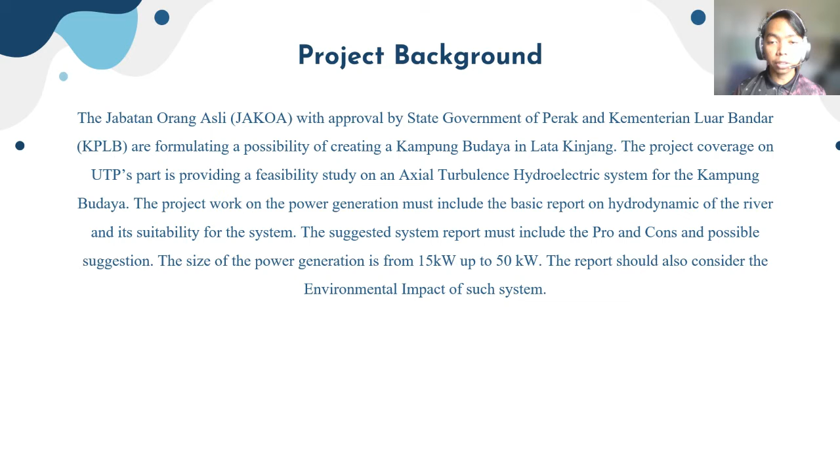Let's start with the project background. The Jabatan Orang Asli, with approval by the state government of Perak and Kementerian Luar Bandar, are formulating a possibility of creating a kampung budaya in Lata Kinjang. The project coverage on UTP's part is providing a feasibility study on an axial turbulence hydroelectric system for the kampung budaya. The project includes a basic report on the hydrodynamics of the river and its suitability for the system, pros and cons,

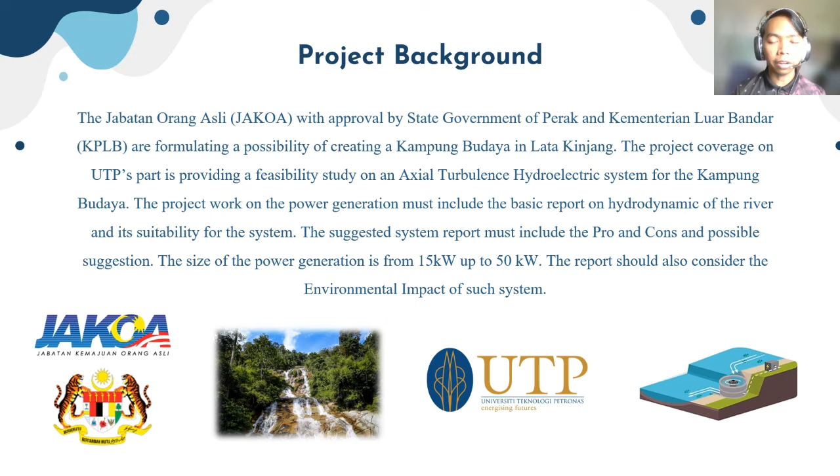and possible suggestions. The size of the power generation is from 15 kilowatt up to 50 kilowatt. The report should also consider the environmental impact of such a system.

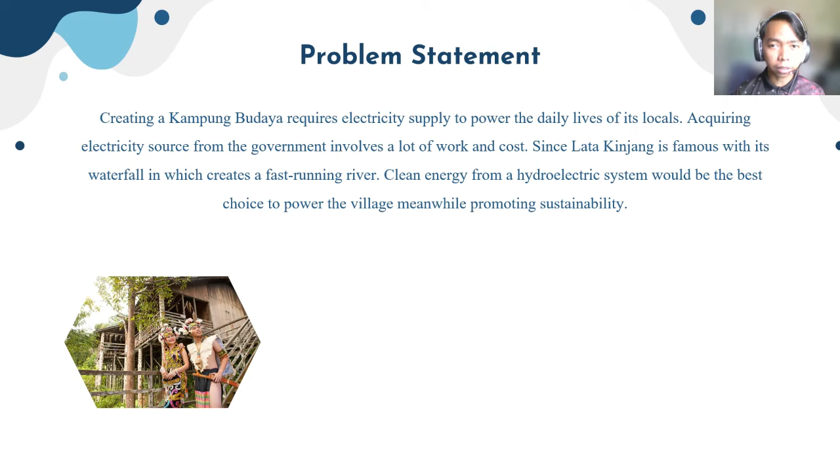Moving to the problem statement. Creating a kampung budaya requires electricity supply to power the daily lives of its locals. Acquiring an electricity source from the government involves a lot of work and cost. Since Lata Kinjang is famous for its waterfall, which creates a fast-running river, clean energy from a hydroelectric system would be the best choice to power the village, meanwhile promoting sustainability.

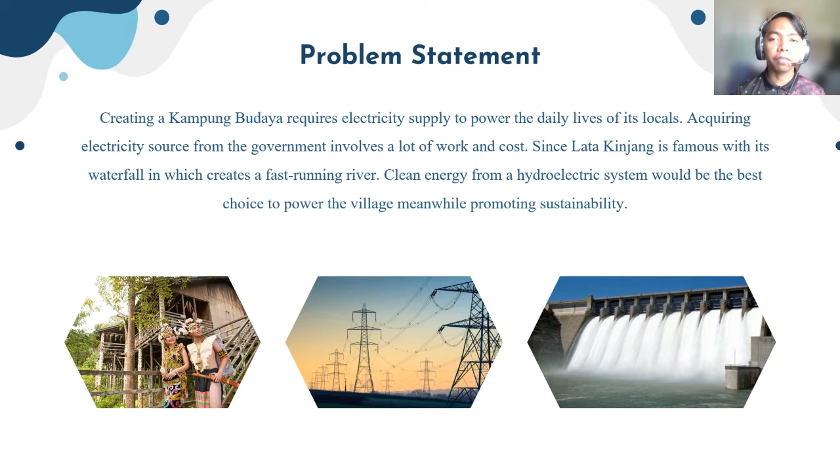The objective of this project is to provide clean and sustainable energy for the communities that reside at Kampung Budaya in Lata Kinjang. To achieve this, an axial turbulence hydroelectric system is to be designed, which provides cost-effective energy and requires less maintenance. For the scope, feasibility study and system design for axial turbulence hydroelectric for Lata Kinjang New Perkampungan Budaya, involving concept generation, evaluation, and selection.

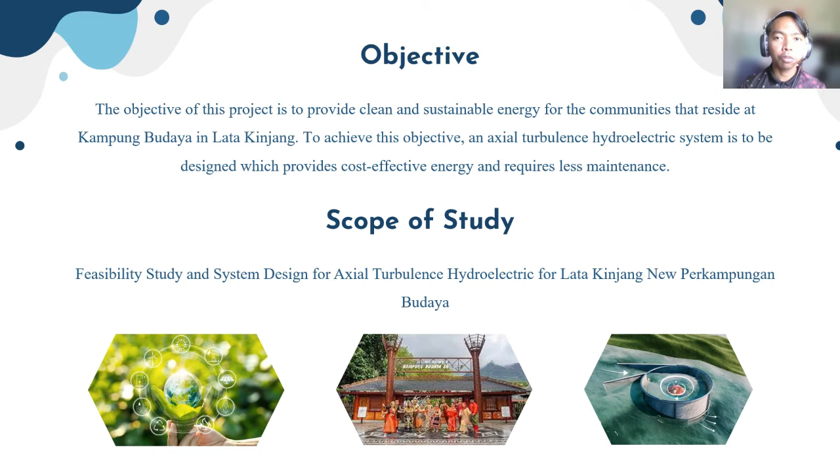Hello, my name is Mr. Oleron. In this slide, I'm going to talk about the datum. There are two datums in these slides, the PicoPica 500 and the Turbulent Hydro. The PicoPica generator is a generator capable of generating electricity up to 500 watts by harvesting the kinetic energy from the stream with a minimum flow rate of 0.1 cubic meters per second.

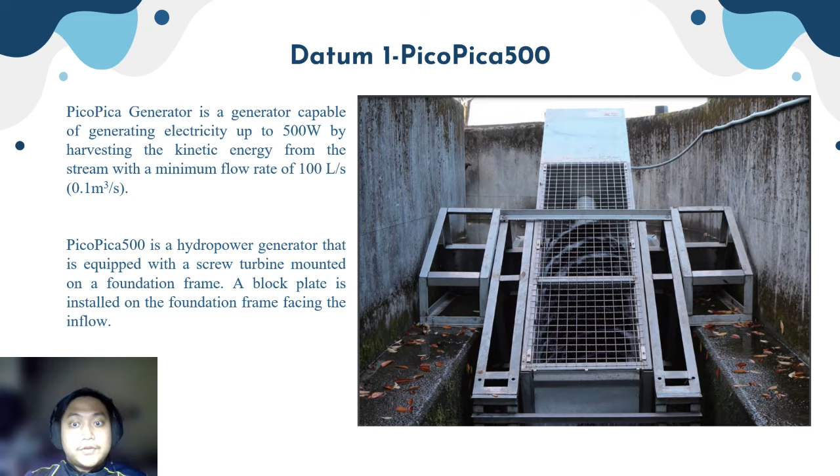PicoPica 500 is a hydropower generator equipped with a screw turbine mounted on a foundation frame. A block plate is installed on the foundation frame facing the inflow. Datum number 2 was the Turbulent Hydro. Turbulent Hydro is a company that designed the vortex hydropower generation system, which can generate about 15 kilowatt to 70 kilowatt of electricity when the site requirements are met.

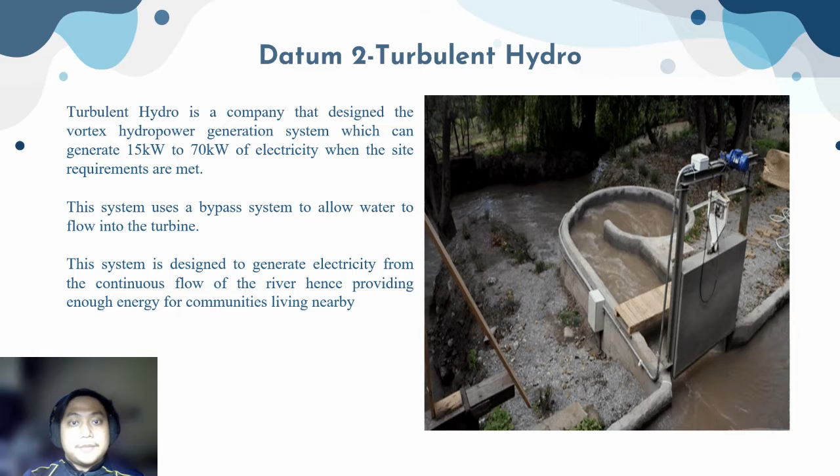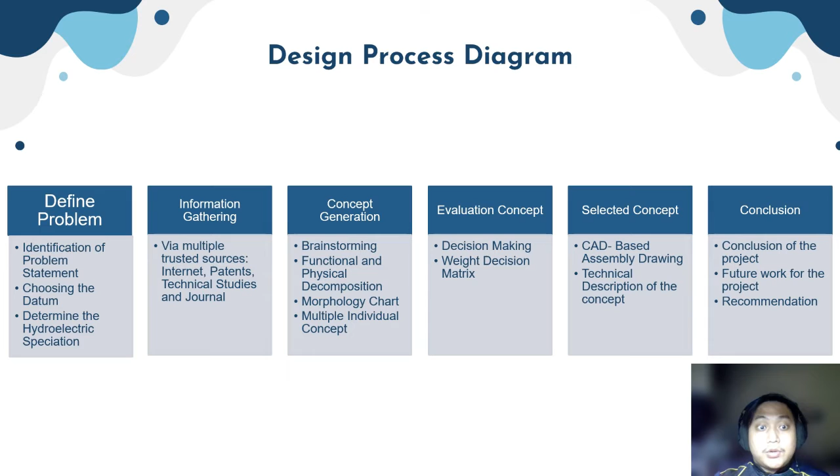To create that, we created a morphology chart, and then each member needed to come out with one individual concept for the hydroelectrics. Once it's done, the concept evaluation takes place, whereby we need to rate every concept using a weighted decision matrix as our guideline. After that, we create a CAD-based assembly drawing for the winner concept with the description of the concept. Lastly, we conclude our project with any recommendation for future work.

As we can see here is the Gantt chart of this project. As shown in the figure, the specific activities are done for this project, with start dates and end dates as our milestones, and we must follow the dates to ensure that our objectives are achieved.

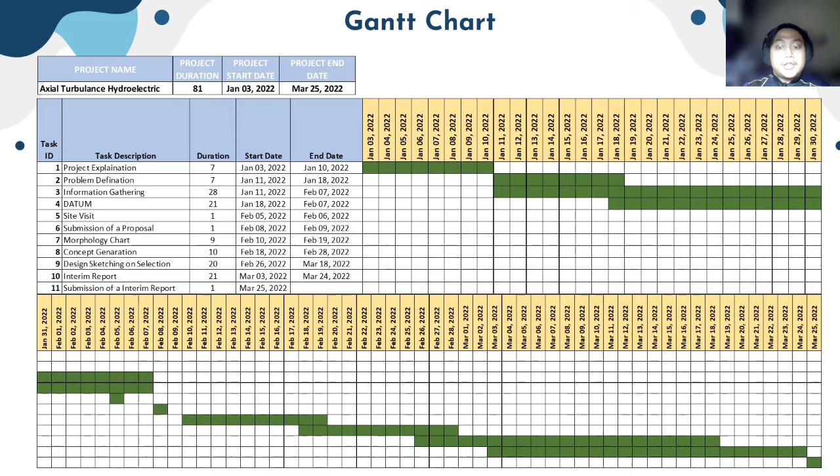Concept generation. So from the information gathering, we have obtained a datum concept to our problem, which are the subsystems that are contained in the hydropower plant. Firstly, there is the filtration system in the top left. It is to prevent debris from the river from passing through the hydropower plant and disintegrating other components.

There is also the flow rate control system, which is important to control the inlet water flow rate to match with the desired output of energy generation and prevent the turbine from overloading. It is also used to avoid flooding or overflowing at the upper reservoir. The plant is also equipped with a water tank system that is responsible for generating flow motion that would initiate and turn the turbine.

The energy translation system, or basically the turbine system, is what translates the potential and kinetic energy of the water flow into rotational energy for the energy generation system to generate electrical power. The power distribution to the area and storage is then managed by the power management system equipped.

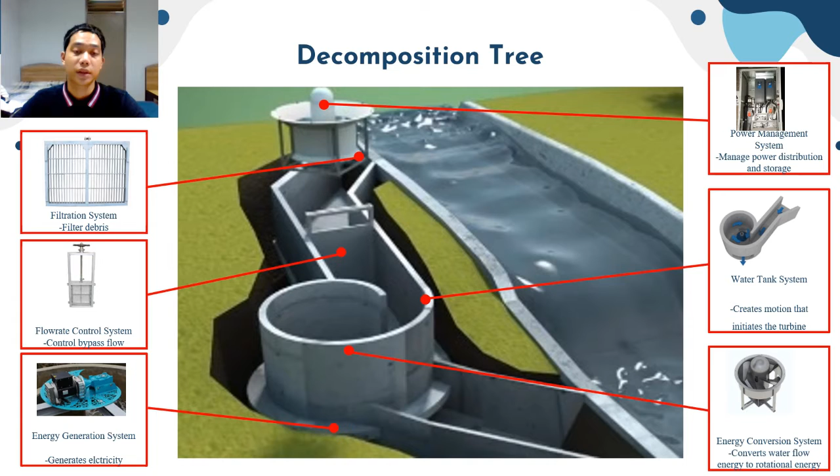After that, we move on to the morphological chart for idea generation. A morphological chart is a visualization tool for generating ideas in an analytical and systematic manner by capturing all the necessary product functionality and exploring alternative solutions and combinations to achieve that functionality. And our morphology chart consists of the subsystems that will complete the hydropower plant, and each option has its own benefits and downsides. Therefore, there are multiple options brought up to create the best possible design ideas.

Options for our filtration system are just a physical barrier for the debris, which come as nets or just metal grills with an automated removal subsystem. Available options for our flow rate control system are just a simple physical gate barrier that will control the amount of flow that goes through the system, or the amount of flow that will bypass the system into the lower reservoir, as you will see in the generated concepts later.

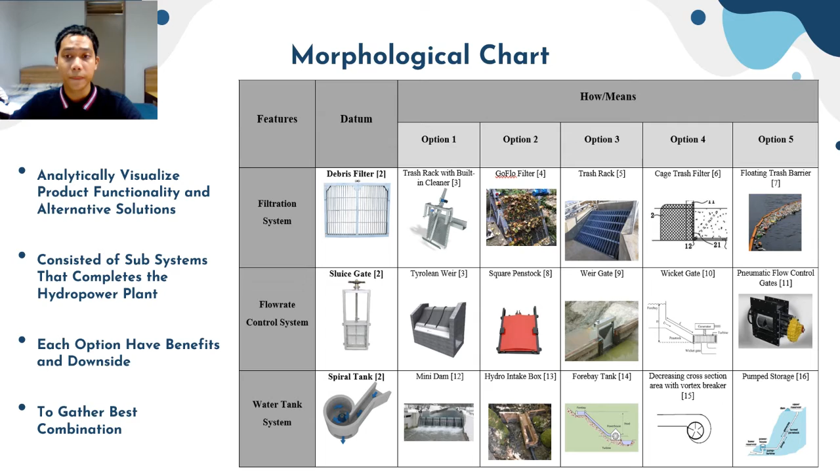Next, we have the water tank system. So the datum water tank system is a spiral tank where the vortex and pressure created will initiate the turbine. Next is the mini dam, which slightly improves the head while maintaining a good flow rate of the system. Next is the water in hydro intake box, which works by directing the flow to the turbine. Next, we have the forebay tank, which increases the efficiency and optimizes the head as the flow is directed straight to the generator rather than having drag slowing down the flow rate or any flow wastage that escapes the generator.

About the selection of turbine system, optimal efficiency conditions between the options are different, such as some require high flow rate, whereas the others require high head. And the produced forces are also different. Some would have higher torque, whereas some would have higher speed. And depending on this, a suitable generator can be selected. Another factor in choosing the generator is the amount and kind of electrical power to be used by the locals there. And the same factor applies when choosing our power management system.

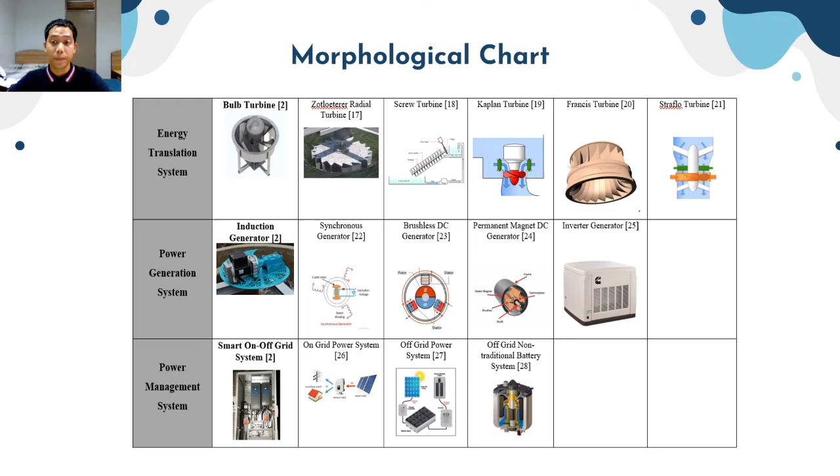After completing our morphological chart with potential solutions to the hydropower plant, each team member has generated concepts based on the subsystems in the morphological chart. For my concept, which is concept 1, the water flow from upstream enters through the bypass inflow channel. Debris from the river is then filtered by the trash rack and can be pulled out using the built-in cleaner arm. The first square penstock gate will control the water intake flow rate, while the second gate is used to control the flushing rate of water out of the forebay tank.

To obtain a desired flow rate, water is stored first in the forebay tank before releasing to the turbine. Water released flows through the penstock and then reaches the spiral tank, creating a water vortex as water tries to exit the tank. The water then turns the Zotloeterer radial turbine, hence generating energy through the synchronous generator. The water safely exits the system, passing the outflow channel, and ends in the downstream. Energy generated is sent to the off-grid power management system to be monitored and regulated.

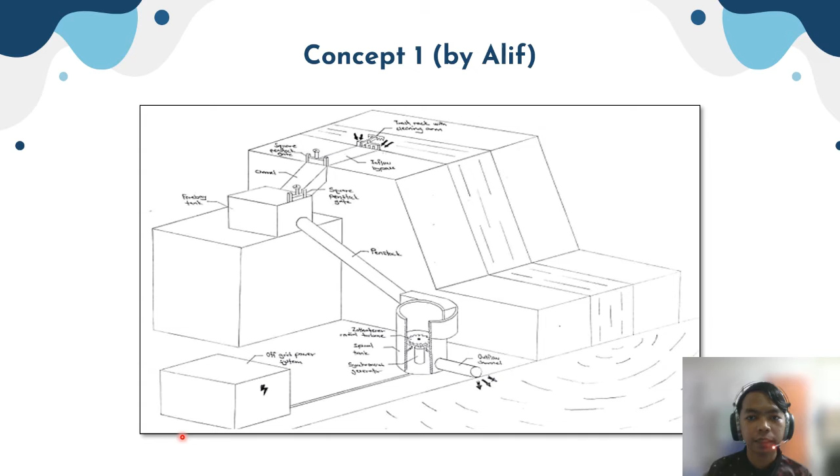For the second concept, a trash rack will be used to filter the debris. The gouging weir gate will be used to control the flow rate of water. Next, the forebay tank will be used to store the water entering from the bypass canal.

The high flow rate created after exiting the forebay tank from the penstock will be sufficient to rotate the Kaplan turbine. This concept is ideal as this turbine specifically requires high flow rate to operate efficiently. The energy created will then be converted to electrical energy using a synchronous generator. The power generated from the generator will then be distributed to the off-grid power system.

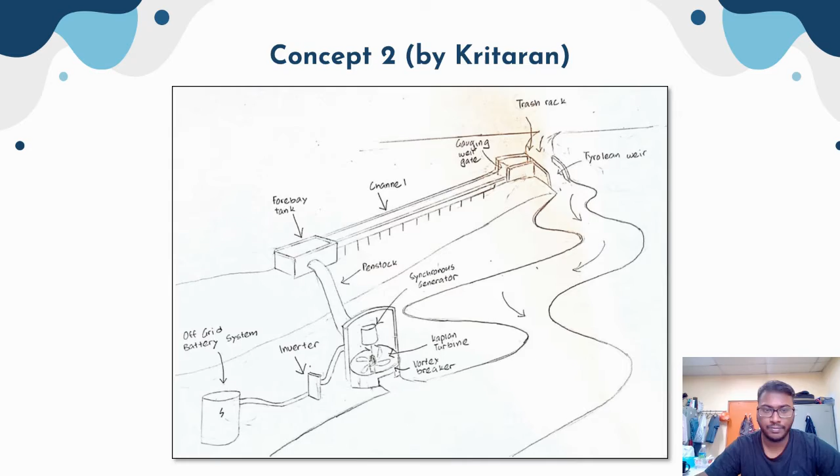For concept 3, a mini-dam is constructed with a screw turbine installed on top of it at an angle. The idea is to create an overflow of water, causing the water to flow through the screw turbine, thus turning it. The work done by the screw turbine will be converted into electricity by a synchronous generator and managed by an on-grid power management system. The opening of the sluice gate will cause the water to flow under the system in case a reduction of flow rate is needed. A floating trash barrier will prevent any floating debris from clogging the screw turbine.

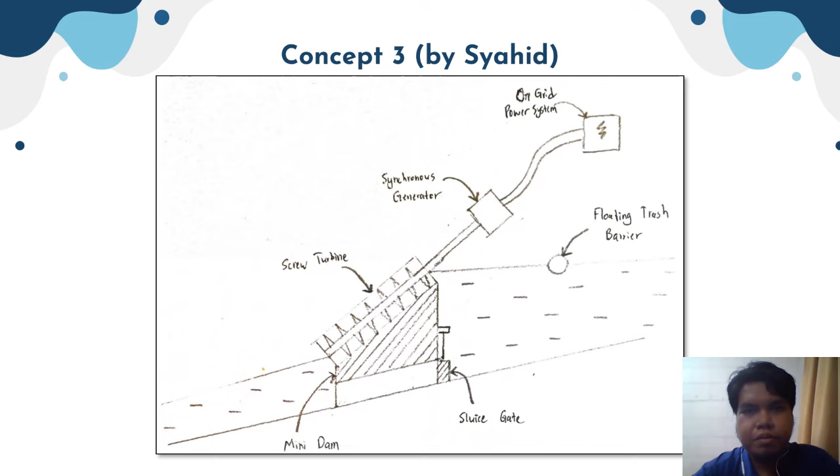Just like the third concept, concept 4 utilizes the inclined and slanted screw turbine but with a combination of a hydro intake box where the flow can be concentrated to the screw turbine and improve the efficiency of the system. The concept also uses a synchronous generator for power generation and an on-grid power system as power management. It uses a weir gate behind the hydro intake box rather than having it under the water tank system like the previous concept. And the cage trash filter is used to prevent the debris from entering any component of the system.

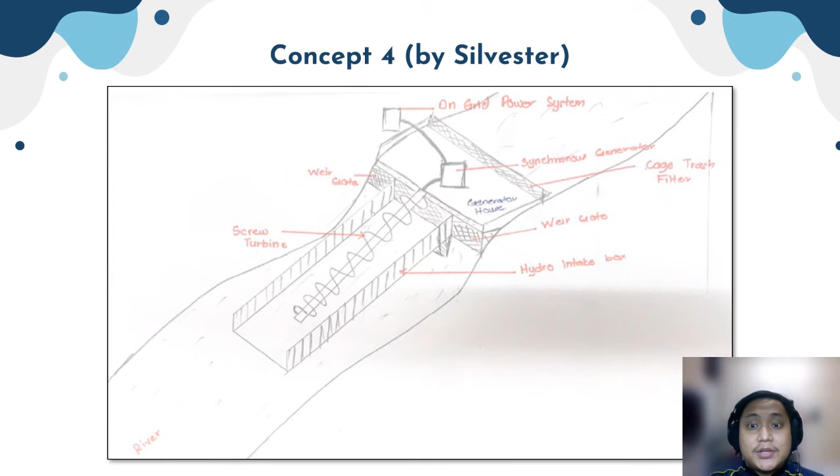So the last concept uses a simple weir gate to redirect the bypass flow to the lower reservoir to control the system flow rate. And we have a Goflo filter that comes with an automated filter cleaning subsystem, which I think is very useful for cleaning the filter instead of having a laborer.

So next we have the power generation that is initiated by the mini dam that slightly increases the head, which is good for the Francis turbine that requires an adequate balance of a good head and a good flow rate. Next, the Francis turbine will then spin the brushless DC generator, which I think we can exploit the low friction of the generator that would keep the momentum of the generator as the flow rate fluctuates.

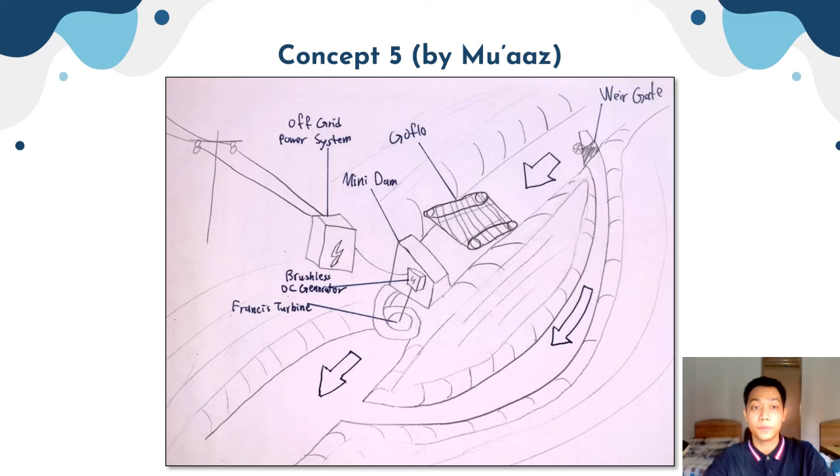And finally, the off-grid system is chosen for my concept because it has no hassle with the electricity providers, making the system a lot simpler, and the system is not interfered with by the electricity grid.

Next, the 5 concepts generated underwent an evaluation process, allowing us to compare and determine which is the best. The evaluation process was conducted using a weighted decision matrix, or WDM. WDM is a tool used to compare the concepts generated with respect to multiple criteria, each with different levels of importance. Level of importance is also called weight. To utilize WDM, we have created a set of criteria and their weights.

Referring to the table shown, we have created 7 criteria, with the first one being smoothness of fluid flow. The entire system relies heavily on the moving fluid, and any blockage will result in system failure in the worst case scenario, thus it receives a weight of 0.12. The second criterion is water storage capacity. In case of low natural flow rate, which is a possible bad scenario, the storage capacity will determine how much of the negative effect can be reduced. It receives 0.06 as weight due to its

low possibility. The third criterion is efficiency of power generation. The site has a limited flow rate, thus a high efficiency is preferred. It receives a weight of 0.12. Fourth is the reliability of power supply. It is one of the most important criteria for any energy source, especially if it is the main energy source, thus receiving the highest weight, 0.24.

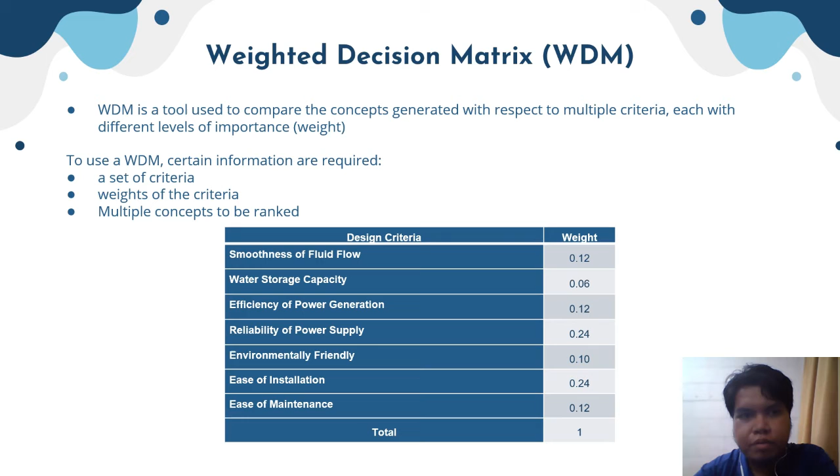Fifth would be environmentally friendly, because the site is a tourist spot. The criterion has a weight of 0.1. Sixth is ease of installation, due to the site being located on quite a secluded hill. It has a weight of 0.24. Lastly, ease of maintenance with a weight of 0.12. Any downtime for the system means that no power is generated, thus it is required to be minimal.

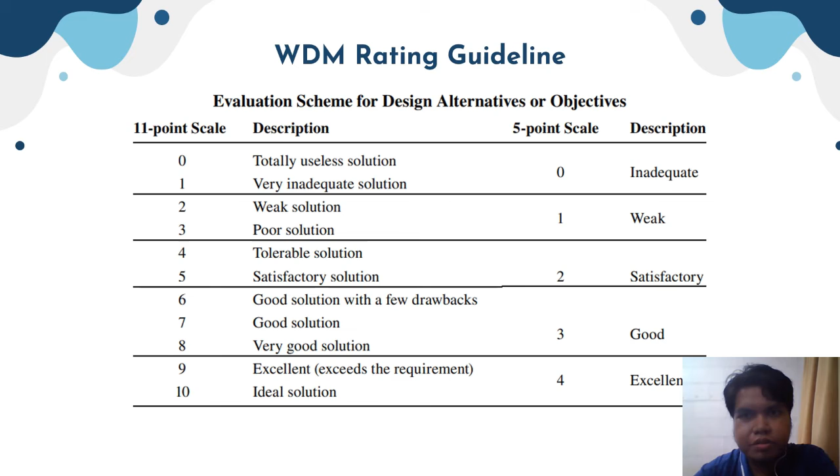To rate each concept, the members of this group are required to follow the 11-point scale rating guideline. The 11-point scale ranges from 0, which is a totally useless solution, to 10, which is the ideal solution. Concept 1, which is my concept, obtained a score of 5.32.

The smoothness of fluid flow received a 6 since the multiple passages may increase the chance of blockage. Water storage capacity also got a 6 since it allows the control of flow rate but takes additional space. Another 6 for efficiency in power generation due to the Zotloterer radial turbine having decent efficiency.

The highest score, which is 7, is for reliability of power supply, because the water stored in the tank can be used to compensate in case of low fluid flow rate for a period of time, which might affect the power generation. And a rating of 4 for environmentally friendly, ease of installation and ease of maintenance, considering a lot of parts and space required for the system.

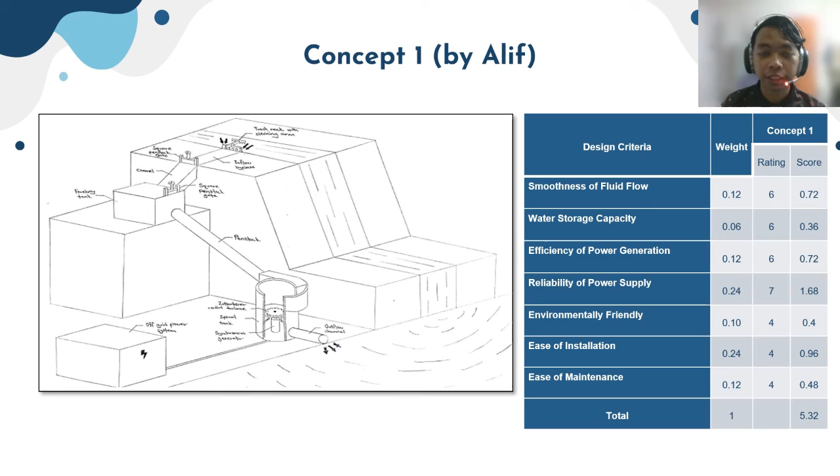For concept 2, the highest is in terms of efficiency of power generation. This is because the concept uses a Kaplan turbine, which is one of the most efficient turbines due to its flexible blade. It received the lowest rating in the same criteria in concept 1. This concept also scored a high rating in terms of power reliability because of the usage of an off-grid battery system.

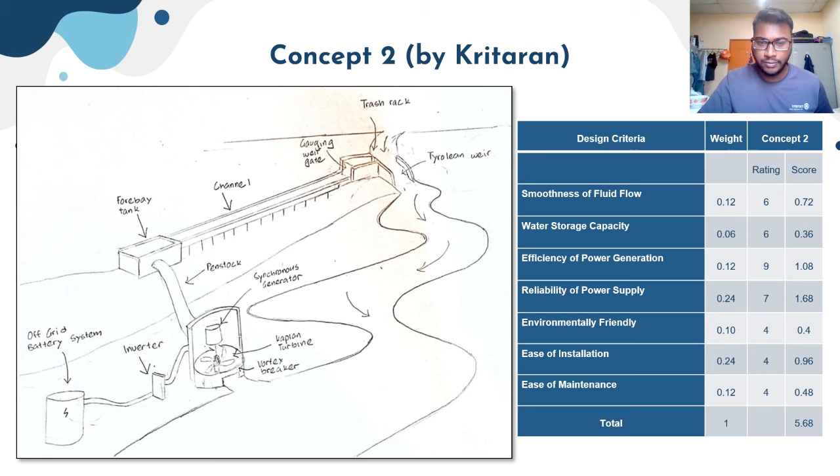For concept 3, the highest rating is in terms of smoothness of fluid flow because the concept does not require any bypass. However, it received the lowest rating in water storing capacity because it relies on overflow, thus any water stored cannot compensate any sudden drop of flow rate. It receives a rating of 7 in efficiency and ease of maintenance. This is because the screw turbine requires low head and its components, turbine and generator, are above water.

The reliability of power supply receives a 6 because it cannot operate below average flow rate. Environmental friendliness receives a 6 because no aquatic life can pass through, and a rating of 4 for ease of installation because the river needs to be diverted during installation.

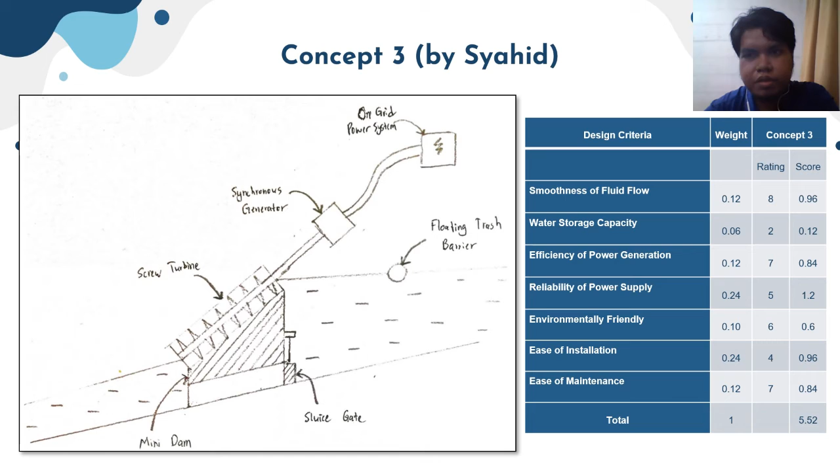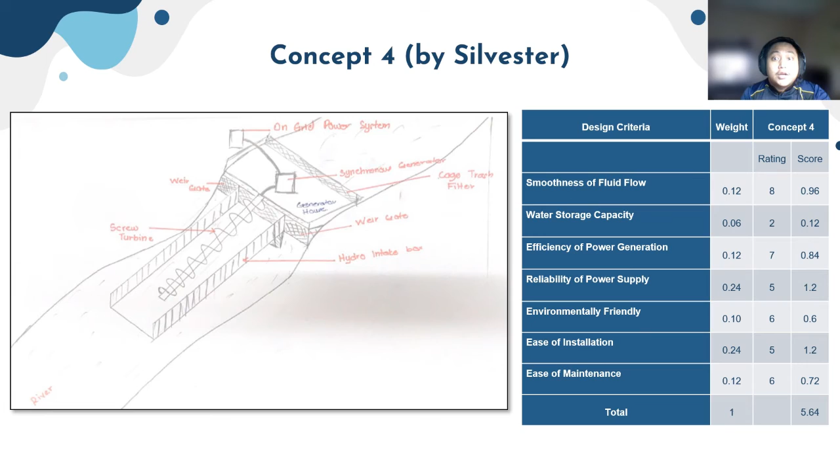Concept 4 is quite similar to concept 3, where the highest rating is the smoothness of the fluid flow and the lowest rating is the water storage capacity. The major difference lies in the ease of installation. Concept 4 can be built off-site and transported to the site, while the other concept needs to be built on site.

So for concept 5, which is my concept, the highest rating falls on efficiency of power generation. This is because of the implementation of the Francis turbine. The lowest rating, however, is in terms of the ease of installation, because the entire river has to be diverted during installation for the bypass route.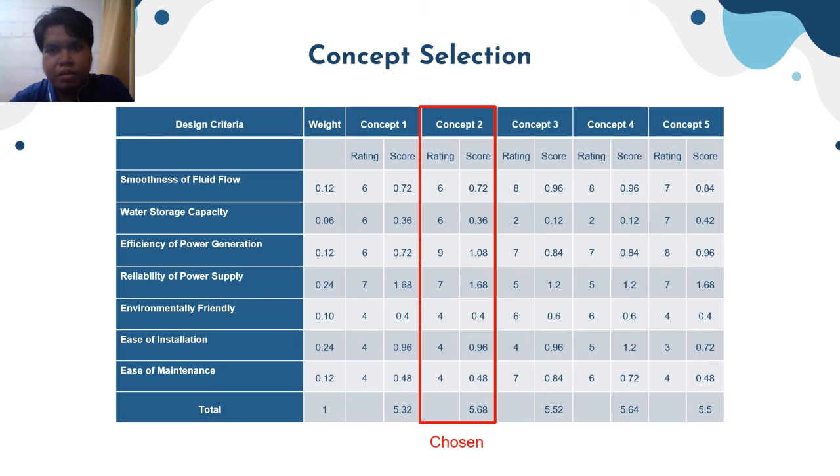Finally, we were able to determine which concept is the best based on the highest total score. The score is calculated by multiplying the rating and its weight. With a total score of 5.68, concept 2 was chosen for further specification.

Now I'll be explaining how we came up with our selected concept. Based on the morphology chart that was generated, each of our team members came up with different design concepts. From these design concepts, we were able to evaluate these designs based on different design criteria. From our discussion, we selected this concept as suitable for our micro hydropower plant project. As observed, this is the assembly drawing for our selected concept.

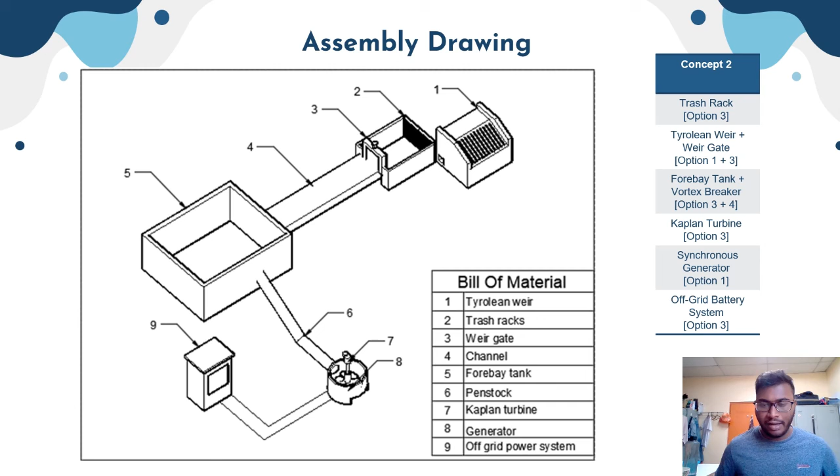Our system consists of 9 parts, starting from the Tyrolean weir to the trash rack, then to the weir gate, then to the bypass channel, to the forebay tank, and the penstock, Kaplan turbine, generator, and finally to the off-grid power system. In the next slide, I'll be further elaborating on the function of each of these parts. Now, I'll be explaining the working principle of our system.

First, the Tyrolean weir will cause the water level along the river to rise and get diverted to the bypass channel. The trash rack will then filter any debris from entering the bypass. After that, the gauging weir gate will control the water flow rate passing through the bypass channel. After passing the bypass channel, the water will then be stored at the forebay tank, which will then exit through a penstock at a high flow rate.

The water exiting from the penstock will enter a spiral tank to spin the Kaplan turbine. Due to the rotation of the Kaplan turbine, the shaft connected to the turbine will spin the generator as well. From this, power will be generated. The power generated will be distributed through the distribution line to the inverter, which converts the AC current to DC. The power is then stored at an off-grid battery system.

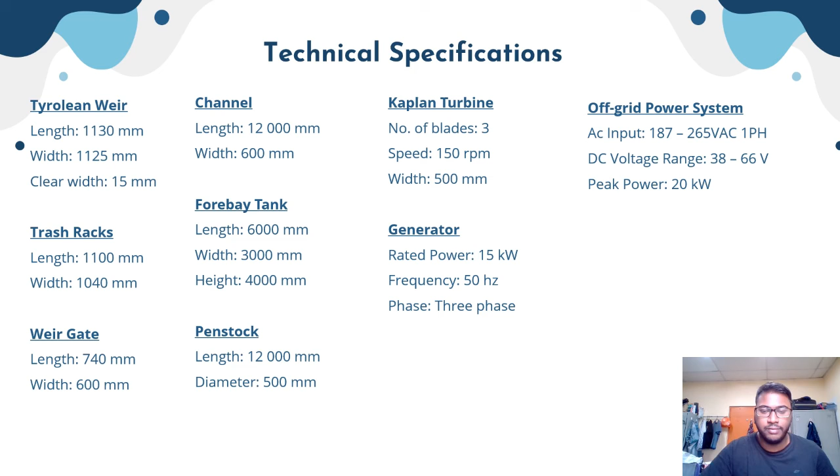These are the technical specifications for our selected concept. These technical specifications are based on technical guidelines that follow ISO standards. For example, the power generated by our generator is up to 15 kilowatts, which is what is needed for our micro hydropower plant. The concept feasibility of our system is based on the practicality of each of the subsystems present.

For the filtration system, the trash rack used is able to filter the debris from entering the bypass channel. Next, for the flow rate control system, there will be 2 parts that will be used, which are the Tyrolean weir and the gauging weir gate. The weir gate used is able to limit the flow of excessive water when there's a high flow within the river. Next, this weir gate is also able to withstand high hydrostatic pressure and external water pressure.

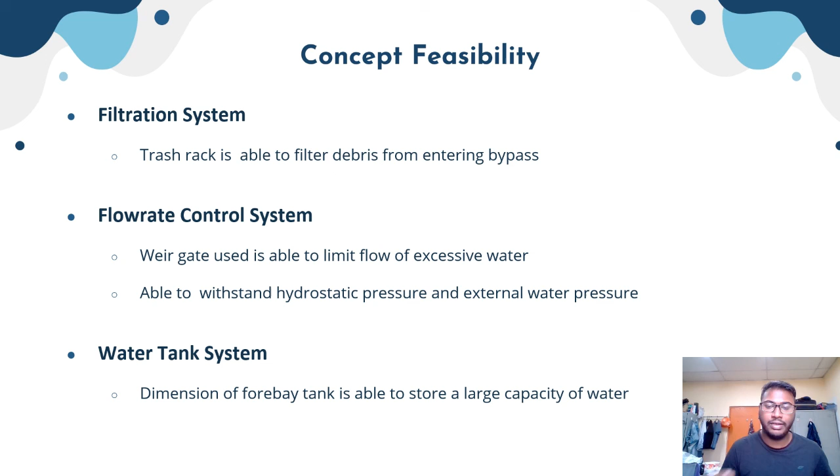Next, for the water tank system, the dimension of the forebay tank that is used is able to store a large capacity of water and able to provide the demand when the need for water arises. The other subsystem that is present is the energy translation system, in which the rotation of the Kaplan turbine will produce mechanical energy, which will later be converted into electrical energy. The reason why we'll be using a Kaplan turbine is because it is able to operate at a high RPM and also will be efficient to operate at a high water flow rate.

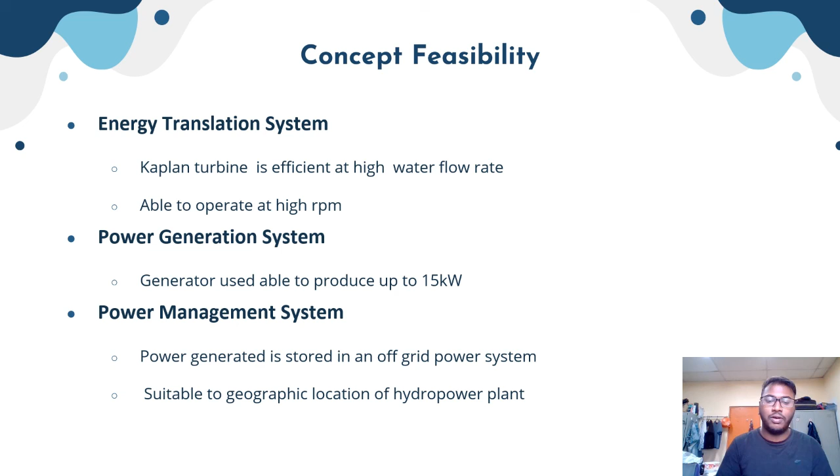Next, for the power generation system, the generator that we will be using is able to produce up to 15 kilowatts, which is suitable for our micro hydropower plant project. Finally, for the power management system, the power generated from the generator will be stored in an off-grid power system through distribution lines. The reason we'll be using an off-grid power system is because it is suitable for the geographic location of our hydropower plant. Now on the conclusion.

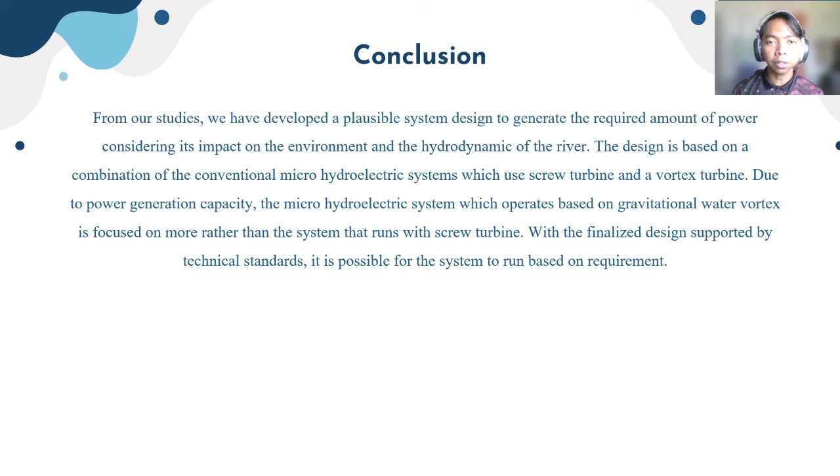From our studies, we have developed a plausible system design to generate the required amount of power, considering its impact on the environment and the hydrodynamics of the river. The design is based on a combination of the conventional micro hydroelectric systems, which use screw turbine and vortex turbine. Due to power generation capacity, the micro hydroelectric system which operates based on gravitational water vortex is focused on more than the system that runs with screw turbine. With the finalized design, supported by technical standards, it is possible for the system to run based on the requirement.

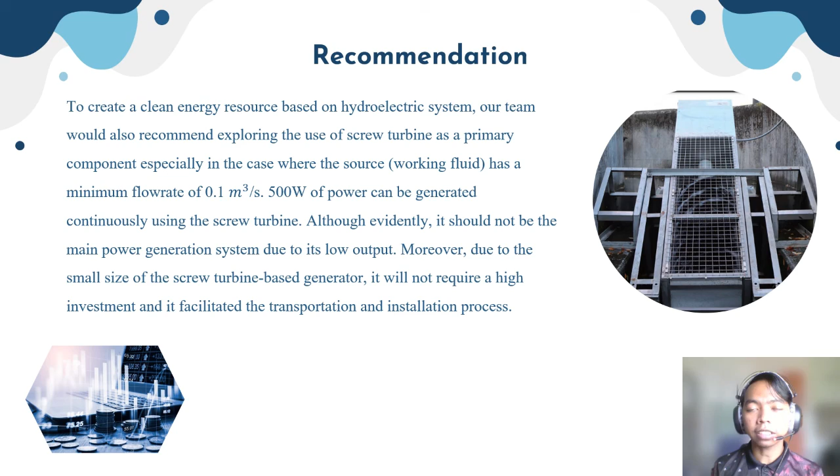As for the recommendation, to create a clean energy resource based on the hydroelectric system, our team would also recommend exploring the use of screw turbine as a primary component, especially in the case where the source working fluid has a minimum flow rate of 0.1 cubic meters per second. 500 watts of power can be generated continuously using the screw turbine, although evidently it should not be the main power generation system due to its low output. Moreover, due to the small size of the screw turbine-based generator, it will not require a high investment and it facilitates the transportation and installation process.

This small power generator can be used to power the street lights for a rural area, thus increasing accessibility for the area and/or reducing the electricity cost. Designing, assembling, and installing the screw turbine-based hydroelectric system should not take more than 6 months, dependent on site constraints, because its main attributes are simple and cost-effective.